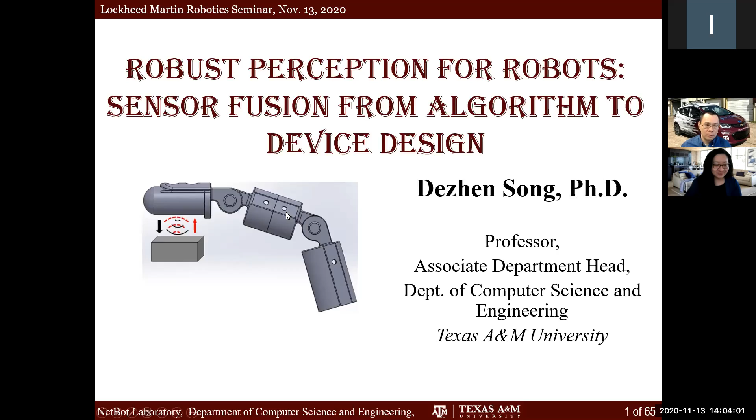So the topic we're going to focus on is the role of sensor fusion in robot perception. We're going to start with 3 questions we're trying to answer: What is sensor fusion? Why do we need it? How do we perform it?

So we have to put this in the context of robotics, because this is our main area. If you're familiar with robotics, you might have heard of this thing called the SPA model. The robot takes information from the environment as sense, forms the understanding of the environment as self, plans for next action, that's plan, and then executes the commands and causes a change of status, that's the actuation or action. So in the SPA model, you can see the information flows in from the sense side. If you have poor perception of something, then the rest of the chain will break down, garbage in, garbage out. That is the reason in my research I focus on the sensing perspective.

So of course, sensor fusion definitely falls in this category.

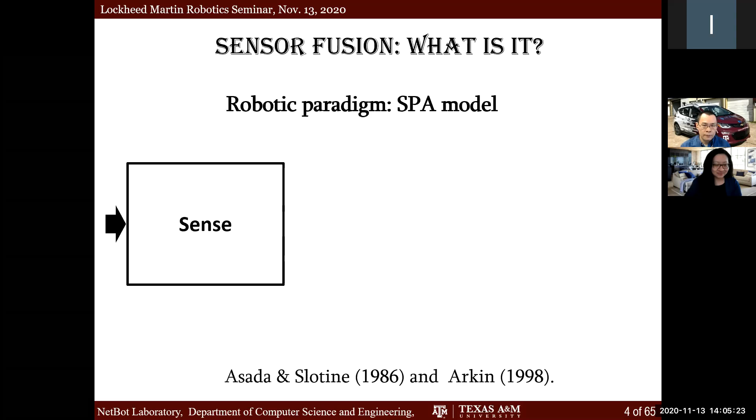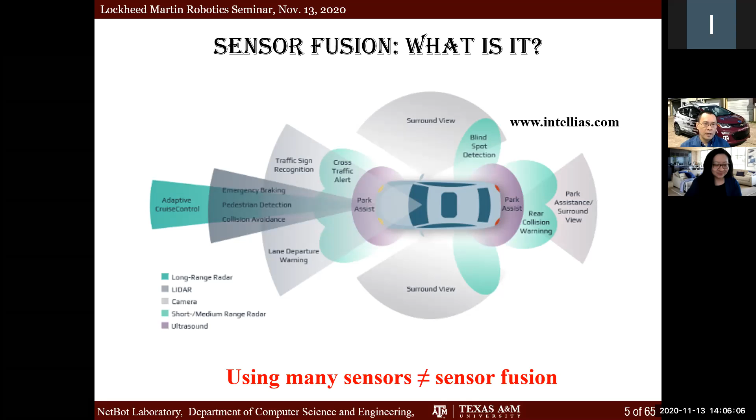I want to put this in the autonomous driving context. This is one of the application areas of my research. You can see that modern autonomous vehicles have many sensors on board, from long-range radar to lidar, camera, short distance radar, ultrasonic, and also GPS, inertial sensors. That's a suite of sensors being installed. But one point I want to mention is that using many sensors does not equal sensor fusion, because sensor fusion itself is trying to reason about the robot status using many sensors.

Each sensor will provide an estimation of the state, which characterizes the status of the robot and the environment it lives in, and we can use a vector to represent that, the X. This has a hat because it's the estimation of the state. You will also come with some sort of uncertainty assessment of your estimation, how good it is. In many contexts, it will manifest itself as a covariance matrix of the random vector X. You might have different representations, but this is just one common way of characterizing uncertainty. In the sensor fusion process, we like to aggregate these estimations to come up with a more reliable, more accurate estimation of the states, and also update its uncertainty range.

This gives you a mathematical context of sensor fusion. But we also need to understand what the states are and what characteristics of uncertainty they have. Sensor fusion itself is trying to reduce the uncertainty. That's two very important metrics when it comes to sensor fusion: robustness and precision. These two things are going to be the main themes in this talk, how to especially emphasize and improve upon those two metrics when you perform system design or algorithm design in perception tasks.

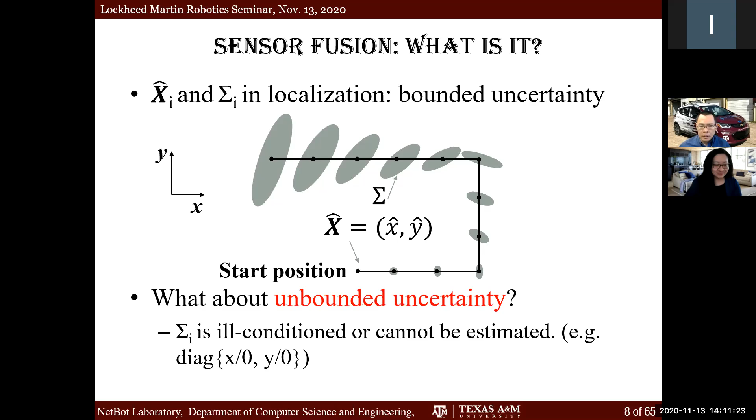So what is sensor fusion from a mathematical perspective with this context of uncertainty? We can look at this from 3 different layers. The simplest one, the most fundamental one we have to work on, we call feasibility. Given the estimation from each sensor modality and its uncertainty, can you figure out aggregate states? You can hook this up in a straightforward way - could be switching, you just pick up any sensor, or maybe you can do averaging, or maybe some smart optimization. But that is feasibility - can you get this result out?

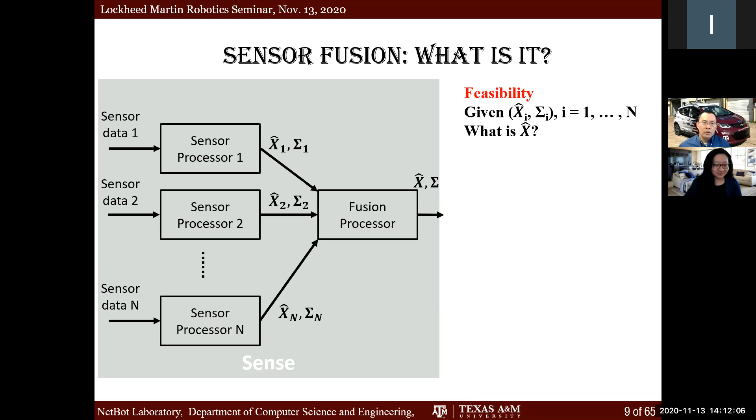But more importantly, if you go to the next layer, that would be precision - if you take uncertainty into consideration. So what is your new uncertainty? How do you minimize it? In the covariance matrix, it's going to manifest itself into things like maximum likelihood estimation, some sort of least squares problems you can solve. You might immediately realize that these 2 layers can only deal with situations where uncertainty is bounded in a nice closed form format, like in the previous example.

So then that goes to the most difficult one, and the one we often run into - sometimes we don't even know how to write it mathematically. We try to give it a mathematical characterization here, which might not be accurate, but we have something to start with - so-called robustness. You're given the uncertainty measure and the readings/estimations of the states, trying to ensure your output uncertainty is bounded, even when some input uncertainty is unbounded. Is this possible or not? Can you solve this? This is more of the robustness issue I deal with.

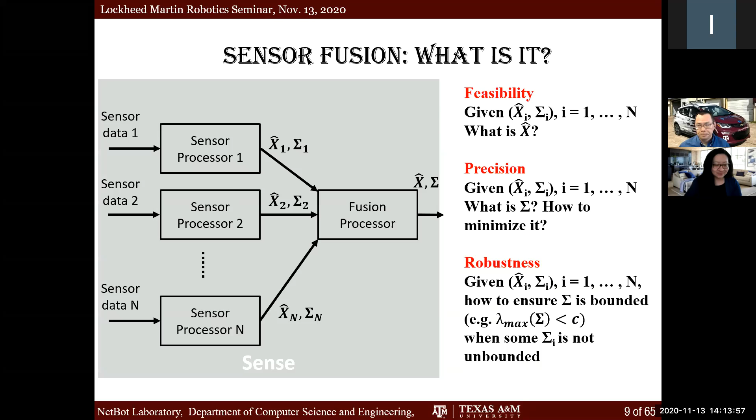So this is the kind of problems that we have to address. Robustness is the key thing here in perception. So how do we get there? I'm trying to use previous examples of how I personally got into this research area, trying to understand this problem through different robot and perception system designs.

I'm going to start with two early projects we did in our lab. The first one I'll talk about is the autonomous motorcycle we built back 16 years ago when I was a grad student at UC Berkeley. The design was at the time when we were participating in the DARPA Grand Challenge, in 2004 and 2005, two times.

If you know a little background, you're probably aware that the DARPA Grand Challenge essentially got this wave of autonomous driving trend started. As an early participating team, DARPA gave out a $1 million prize to encourage people to come up with autonomous driving strategies.

This was over 16 years ago. At the time, computation and sensing were very primitive. Also, the environment they were dealing with was not much easier. So DARPA was trying to do this crowd-sourcing type of approach to figure out who could solve this.

The competition was to design an autonomous vehicle that could drive over 100 miles on desert terrain, because the real motivation behind this was that the US was at war with Iraq at the time, the second Iraq war. Convoy trucks could get attacked by roadside bombs, and they were trying to see if they could get autonomous vehicles to deliver goods to frontline soldiers. So that's the background story behind it.

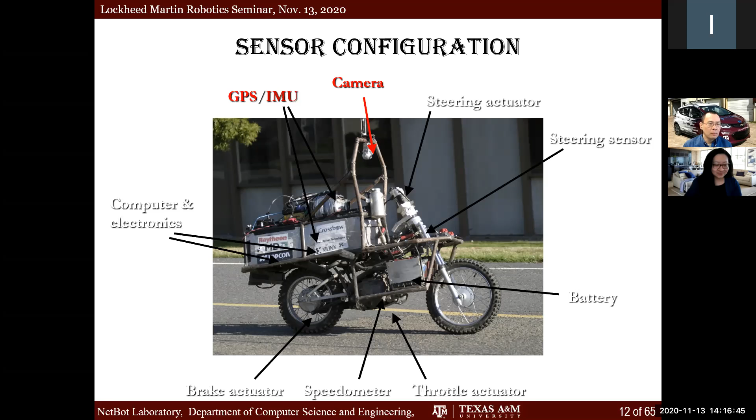The idea at the time was basically what we call GPS waypoint navigation, with camera to help navigate the terrain.

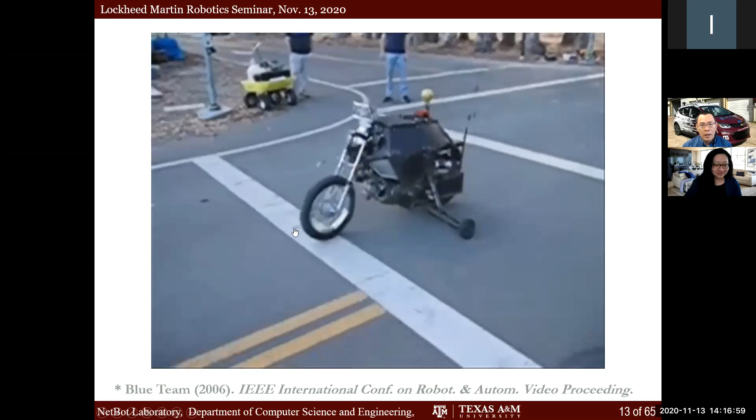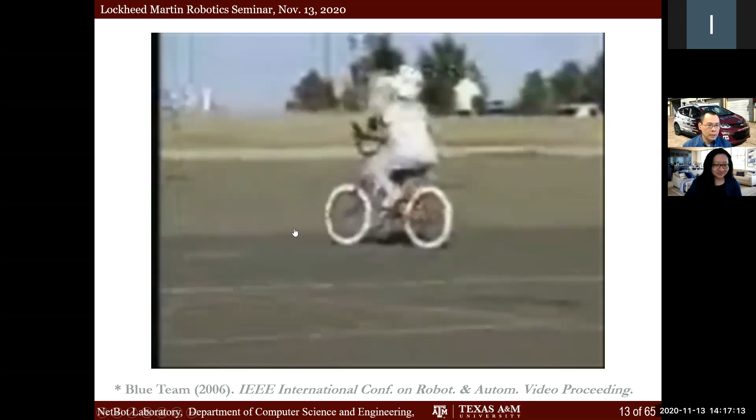GPS itself was not accurate enough at the time. We didn't have RTK GPS 16 years ago; it had accuracy of only around 10 meters, sometimes even worse. GPS alone would not be able to keep the vehicle on the road. We had to recognize the terrain and guide the vehicle in the local coordinate system while following the global GPS route. We also had to use sensors to help balance the vehicle, putting all these navigation tasks together.

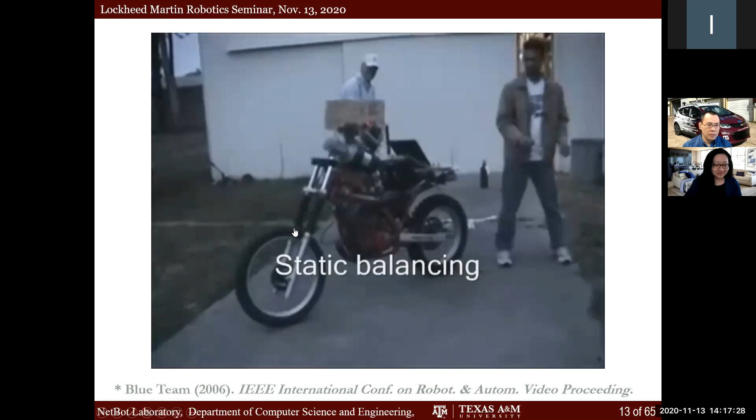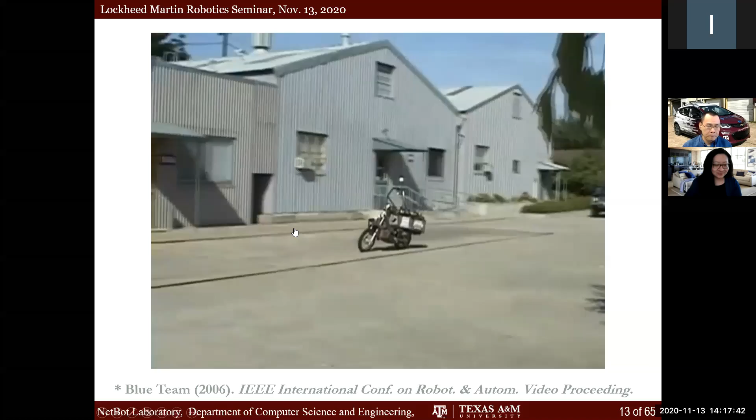I realized that for a lot of tasks, you just have to combine those sensor readings all together. No single sensor can solve the problem we are facing. I'm not going to run the entire video, I just want to give you the background idea behind this. Now I want to move to the next slide.

During the competition, there's actually a bit of history behind it. One of the teams was named Velodyne. If you're in the autonomous driving domain, you might be very familiar with this name now, because Velodyne essentially started as a DARPA Grand Challenge 2004-2005 competition team. Their biggest contribution was prototyping the 3D lidar system, one of the early lidars built, which eventually became the Velodyne product we're very familiar with in the autonomous driving domain.

This is you witnessing history here. It takes you back to 2005, when this whole thing had a size of a couple of feet in diameter. Right now it's much smaller. After the DARPA Grand Challenge, we have this thing called the DARPA Urban Challenge. We did not participate in that because one explicit requirement for that competition was 4 wheels, and we only had 2. So that's what we did.

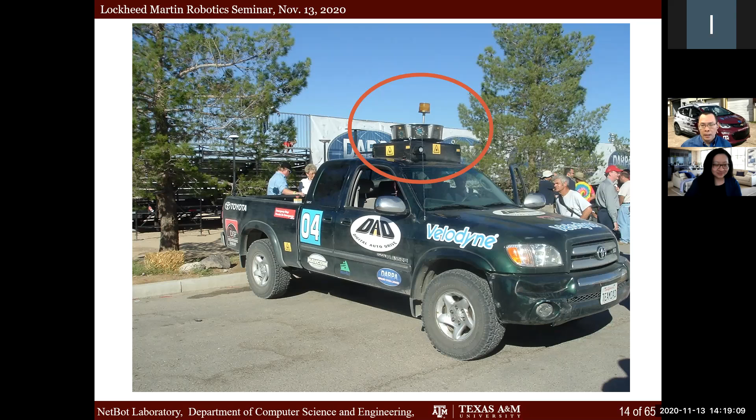I moved to A&M to be a faculty, but my team at UC Berkeley formed a company led by Anthony Levandowski called the Berkeley 510 Systems. That team was acquired by Google. The task at that time was to build two vehicles you all know today: one is the Google Street View vehicle, the other is Waymo, the autonomous driving vehicle you're all familiar with. We're very happy that our team played an important role in this piece of history.

If you look at the Waymo vehicle, you can see the Velodyne lidar on top and the other suite of sensors put together. It's gradually formulated kind of a standard template of how many sensors you have to use for autonomous driving. But actually, sensor fusion is not just for autonomous driving.

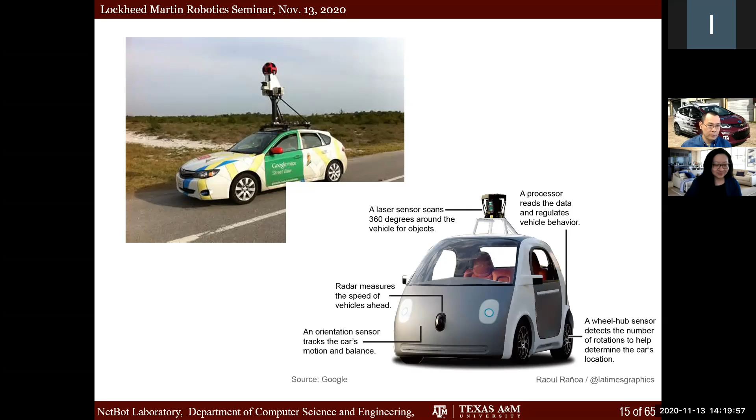It's also important for service robots. In this case, I'm going to talk about a very expensive service robot, Robonaut, the robot astronaut installed in the International Space Station. In this example, I'm going to show the importance of precision and robustness needed in such a system design.

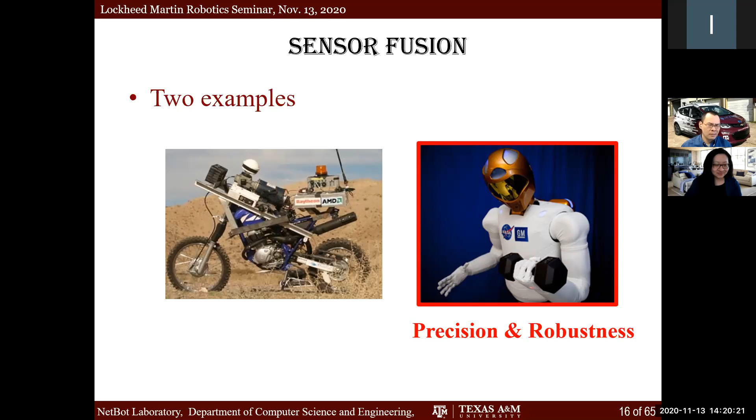So the robot astronaut itself is a humanoid, actually not exactly humanoid. The upper body is humanoid, the lower body is a little different. But it is also the only robot that wears clothes.

My first thought was maybe it's just to make the robot look better. No, it's actually for its purpose. The clothes protect the sharp edges of the metal surface, so when this robot works closely outside the International Space Station, it will not cut the astronaut's spacesuit open. It's a kind of protection mechanism.

It's a soft armor. But it also tells you that the robot has to work in a very tight space, and you need to know its precise location while it's moving around in the space. There's no GPS, and the robot also needs to know the 6 degrees of freedom pose. So you need to solve that simultaneous localization and mapping problem.

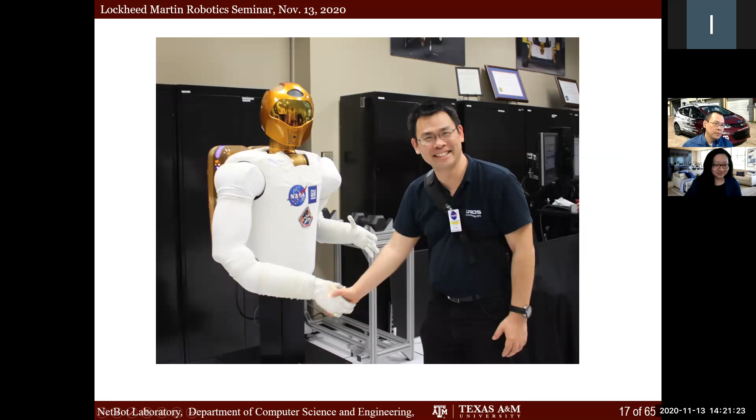This is called SLAM in robotics, simultaneous localization and mapping. The purpose is to find solutions for two problems at the same time: localization, where am I, especially in this case the 6 degrees of freedom pose, and mapping, what does the world look like? This has a lot to do with the sensor type and your landmark type, but you have to characterize your environment as a map.

So how do we deal with this? The robot, keep in mind, when it was first designed, was designed as a teleoperated robot, not as an autonomous robot. So it has a whole bunch of issues with the perception system we have to fix.

But what's important to keep in mind is the working environment. It could be inside the International Space Station or outside. So if we design for this, we cannot add any additional sensors to it; we have to use onboard sensors. In this case, what's available to us that we identify as most useful is binocular vision installed in its head, and also the high precision IMU installed in its body.

But it actually sustains some sort of vibration from time to time, so the IMU may get off, and vision may get challenged when you face the dark side of the universe—you might not have good landmarks to help. So it's very important to come up with a robust solution that can deal with this environment change, when your camera's dynamic range can be challenged, and your IMU can be challenged.

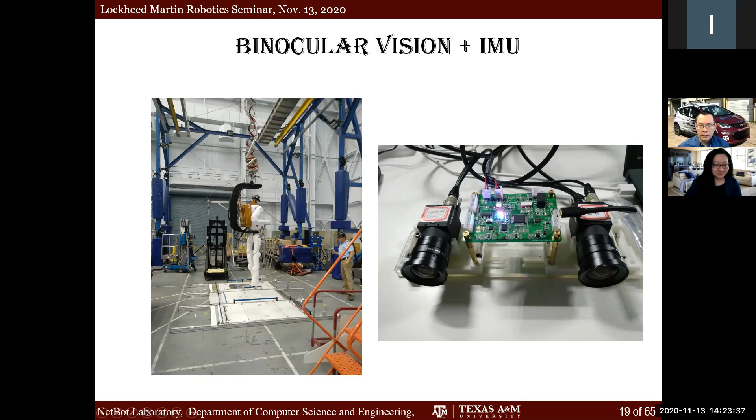Eventually we work out that problem. In fact, one of the results—if you're familiar with Visual SLAM, this video might look very familiar to you. The little pyramid is essentially the perspective of the camera we estimated.

The dots, the red and the black ones, are the landmarks - feature points being extracted and correctly matched to each other. In this particular example, the robot is doing a figure-8-shaped dance. We're trying to give people the idea that this is able to do a full 6-degree-of-freedom estimation. This doesn't tell you how the integration of other sensors works, but essentially it is a result of all of this working together.

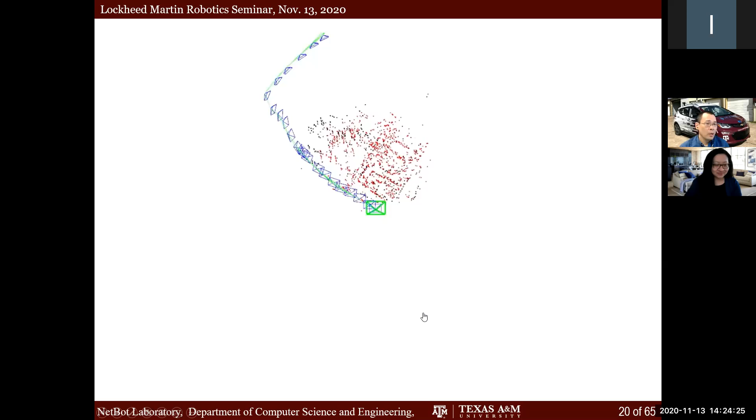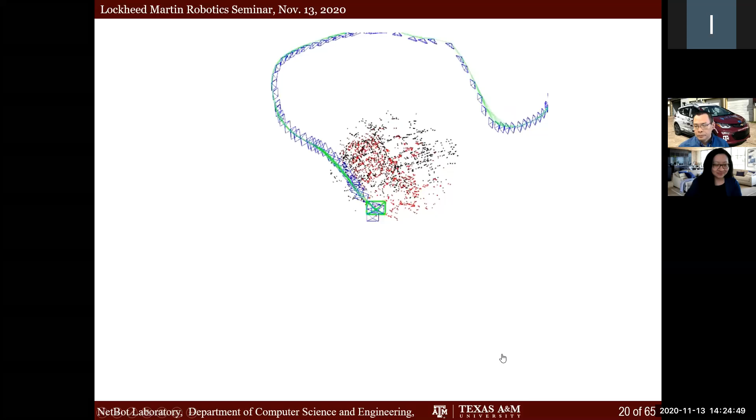The idea of combining an inertial sensor - essentially what we call a proprioceptive sensor - with a camera, which is an exteroceptive sensor, is not a new concept. It is a common way that robotics combines different sensor properties to achieve a robust result. In fact, it is also used in... I'm going to stop this video and move to the next slide.

It's all being used in some handheld devices, like the iPhone. In 2017, at the release of iOS 11, Apple CEO Tim Cook announced the very important milestone of augmented reality: the release of ARKit. This is the first time a regular user outside the lab can really experience what augmented reality is, and that it can run on a mobile platform with limited computation resources, like a simple phone. This is a very important milestone, and also very important for people in the robotic perception domain.

Essentially what the phone is doing is a visual inertial SLAM algorithm inside the iPhone. They combine the IMU on board the Apple device with its onboard cameras, computing in real time the camera pose - essentially the phone pose - in relation to objects in the environment. That allows you to insert a virtual object inside it. This kind of started the era of augmented reality for mobile devices for the mass market. 800 million devices have it, 800 million people can experience it. This is probably the most accessible robotics SLAM software we've ever seen.

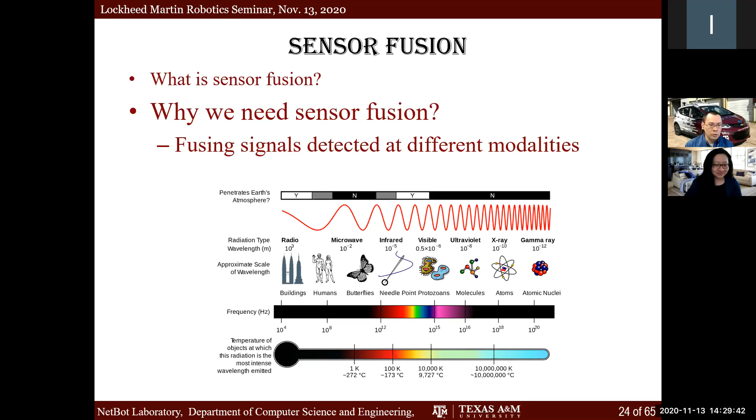Different sensors work on different signal spectrums to give their own unique perception range and capabilities. If you use that well, you can increase safety, and more importantly, ensure that the vehicle will be able to avoid things ahead of time.

One thing I want to point out is that although there are many types of sensors, you can quickly classify them into two categories. Exteroceptive sensors - camera, lidar, radar, acoustic, even GPS - they rely on external signals.

Anything relying on external signals may have trouble when the environment becomes extreme, like poor weather conditions, snowstorms, whiteouts, severe thunderstorms. You might have interruption of signals. You might not get what you want.

Another group of sensors is proprioceptive sensors - inertial sensors, encoders, force sensors. Those sensors' perception process is less affected by the external environment. They're mostly reliable in that sense, but they're not very precise. They do drift a lot.

But biologically, humans also have these two types, and we combine them naturally - just like when you close your eyes and walk a few steps, you have no problem avoiding obstacles from memory. You have a natural integration between these two sensors. So those are the two classes of sensors.

When we design these things, we have to take them into consideration. If we look at this from the uncertainty perspective, you can see exteroceptive sensors' uncertainty model is like a bimodal distribution. If it works nicely, it's relatively accurate and its amount of drift is small. But if it doesn't work well, you have a really big uncertainty range.

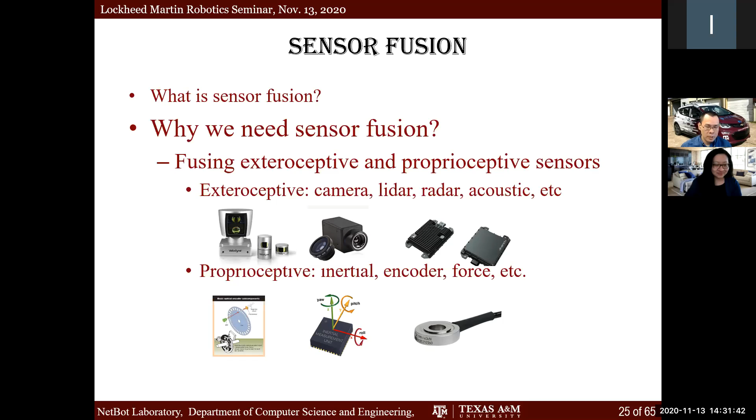That's actually why you need to work with them both to make a reliable perception system. So then we can dive deeper into sensor fusion problems. You can see we have to solve a bunch of small problems to make it happen.

We have to make sure we synchronize all the data readings from different sensors. Temporally, we need to know they receive data at the same time, and we need to make sure they're working in the same coordinate system so we can combine it together. So calibration is a must.

Also, there's a correspondence issue. If you do not have good synchronization and calibration - for example, your data may be captured by different platforms at different times - there's no way to synchronize them. Then you have to figure out how the objects of interest correspond to each other in different data streams. That becomes a correspondence issue.

Of course, if you solve those problems, then you have to face the problem of putting them together to come up with a combined aggregate state estimate and its associated range. That will be the fusion.

You can do simple rule-based filtering and switching. You can do filtering-based or optimization-based approaches. It's up to you to design these things. And of course, at the end of the day, you could design a new sensor that leverages different modalities simultaneously, which we'll touch on at the end of this talk.

If you look at this from the three layers of problems we talked about earlier, you can see that if you talk about feasibility of sensor fusion, that just covered the first bunch of sub-problems. And if you go a little bit deeper for precision, you really need to look into optimization and filtering-based approaches, because those give you explicit closed-form representations of uncertainty.

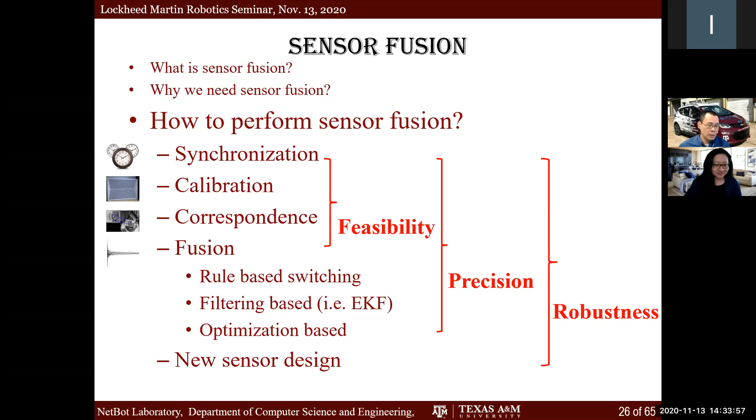And we're going to touch on this in the next few slides. But before we start, we're going to go through 4 examples. So this is just a quick review of the three layers of problems we've been talking about in sensor fusion, to put it into context.

So the 4 examples I'm going to talk about - I'm going to start with feasibility, the calibration-enabled sensor fusion.

This is really just solving the first layer of the problem, the feasibility side. So for when you're working with exotic sensors, in this particular case, a ground penetrating radar that I've been working on. Why would we want to work with it?

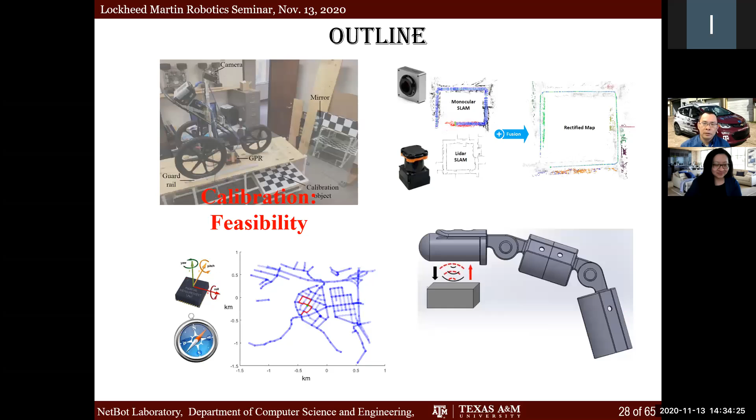Because there's a need. The need is to keep our infrastructure well maintained. The US freeway system was established a long time ago, some segments are 75 years old. So bridges are already at the end of their service lives. They need frequent inspections. Bridge collapse accidents happen from time to time. But the problem is there's no way we can afford manual inspection—that's very labor intensive for all these bridges. So the deteriorating infrastructure calls for an automatic inspection system, especially a robot-mounted inspection system.

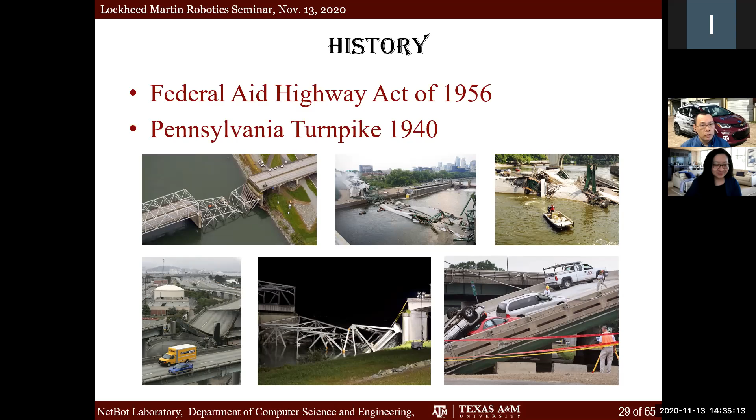In this regard, one of the most capable sensors for doing this is the ground penetrating radar. We found that this radar system is actually a terrain following device. It does not have the ability to provide full-scale mapping to give inspection results that can be used by a repair crew with precise localization. So we try to combine this with other sensors, like camera and lidar, as we're all familiar with, because this is going to help us.

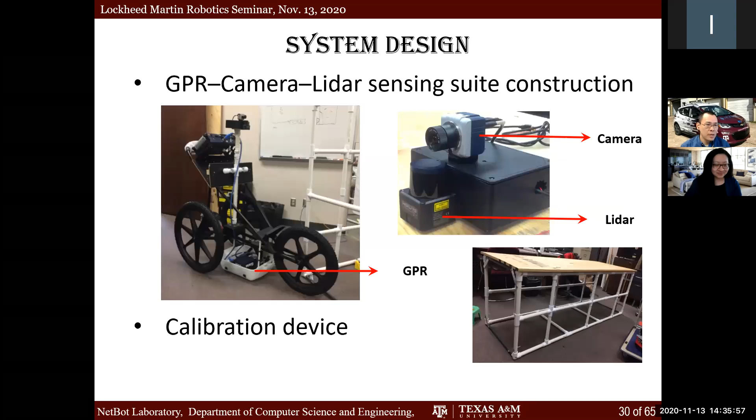But a problem immediately pops up: how can you make these sensors work together? They don't even have joint coverage range. Ground penetrating radar, by definition, looks at things underneath the surface. But the camera and lidar only look at surface objects. But you still need them to co-register in the same coordinate frame. If you link this, you want to make sure they can be expressed in the same coordinate system. It's essentially an extrinsic calibration problem for a sensor suite.

In fact, we can narrow this down because we have a lot of sensors in this design—cameras, GPR, lidar, and encoders. We just need to solve, here we only focus on the calibration between the camera and the GPR, because the rest of them solve the problem within the robotics domain. I don't have to explain them here.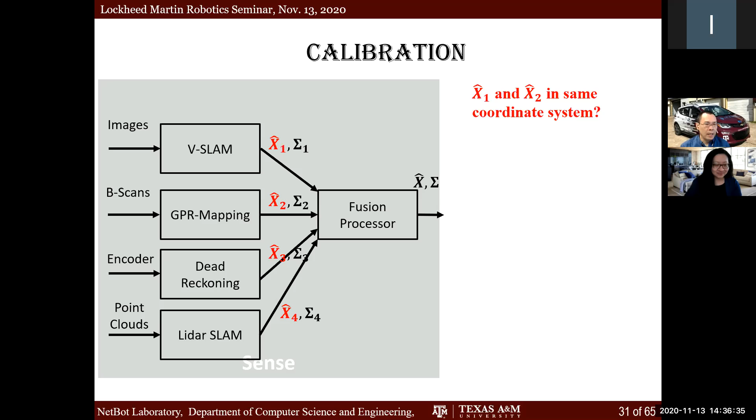It actually creates a parabolic signal, and we can extract the coordinates from parabolic signal extraction. On the other hand, we set up a mirror that allows the camera to look underneath the calibration bridge and be able to see this checkerboard. Of course, we also have to estimate the mirror pose. So this constitutes the calibration system.

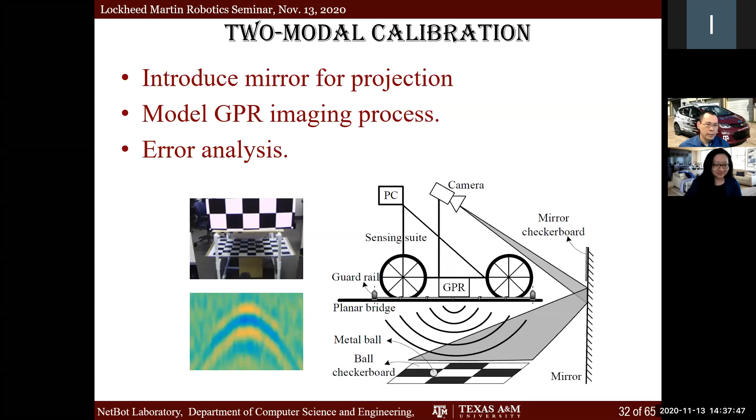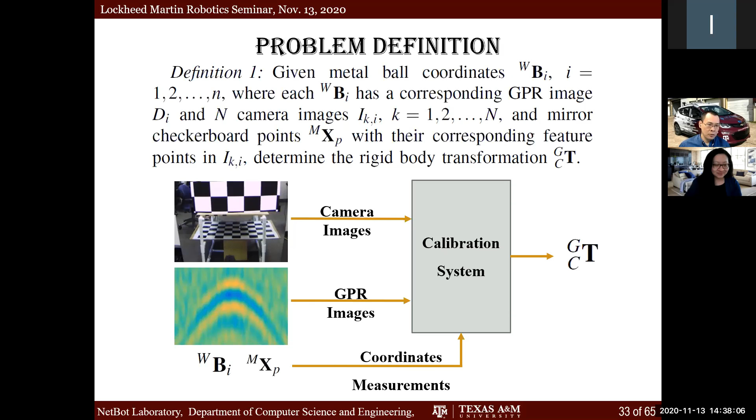They provide data for us to be able to estimate the rigid body transformation between the camera coordinate and the GPR coordinate. So the problem definition is just trying to use the camera images and those parabolic signals created by the ground penetrating radar to figure out the rigid body transformation. So the problem itself essentially is to estimate how these two types of sensor readings can relate to each other in the same spatial coordinate system.

I'm not going into the detailed design, I just need to give you the idea: you need to be able to estimate the camera and the mirror pose, and also extract the signals from the ground penetrating radar to get those parabolic center positions.

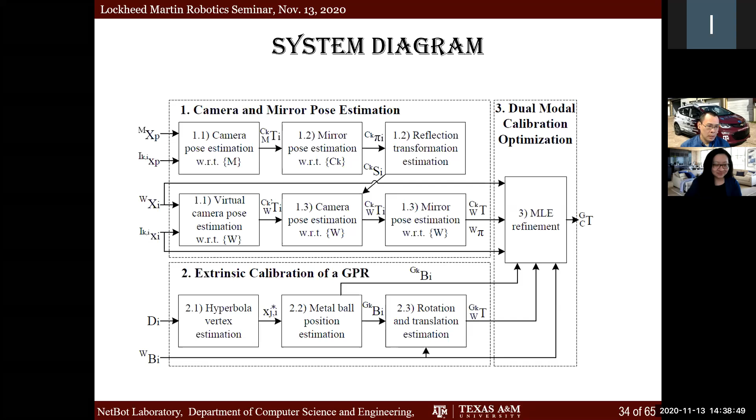When you get all this together, you can fit them into an MLE framework, maximum likelihood estimation. You can also have a nice closed-form representation of your uncertainty range, because everything we do can reasonably assume Gaussian assumptions in pixel coordinates and in GPR coordinates, then we can derive how the uncertainty works in our estimated transformation. So essentially you have to put it into perspective projection model, mirror reflection model.

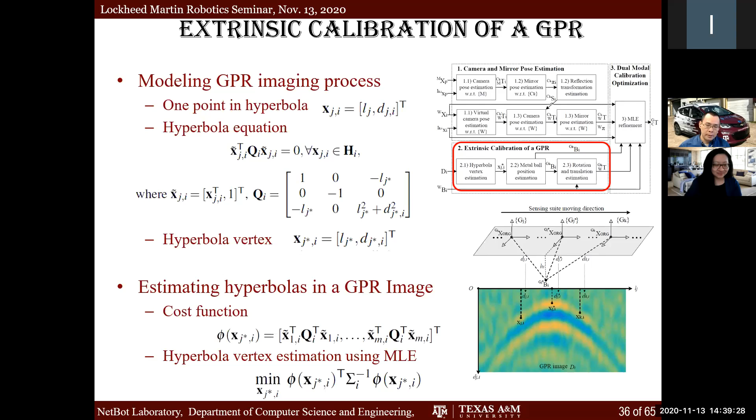You estimate the camera pose and the mirror pose simultaneously, putting it together with the GPR parabolic extraction model, because each metal ball creates a parabolic response in the GPR reading, and the parabolic vertex is essentially where the ball is in the GPR coordinate, allowing us to obtain its position in the Euclidean system. Putting all this together, we minimize this, then do error analysis to obtain the uncertainty. That gives us the answer we want: the cross-coordinate system transformation, and the kind of uncertainty introduced to the system. Later, when we do sensor fusion, these all play a role.

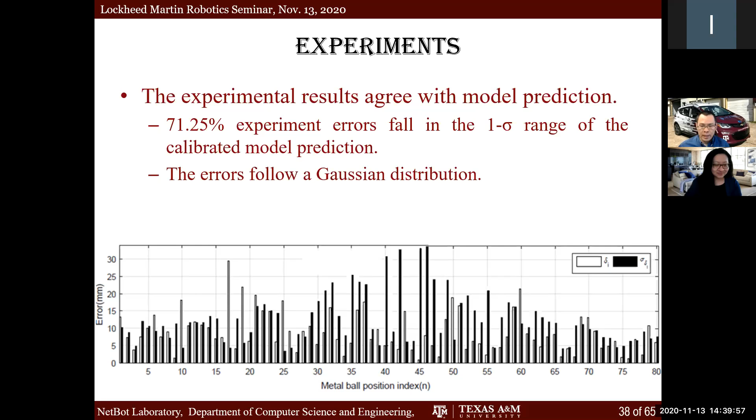So we test it against our ground truth, and it works. You'll have to believe me on that, but time doesn't allow me to go into the details or read all those errors and maps and things like that.

More importantly, those readings being registered to the 3D coordinate system, we know precisely where they are. If you want to open up the bridge to break the concrete, we know where to operate to fix the bridge. So that's how that helps serve the purpose.

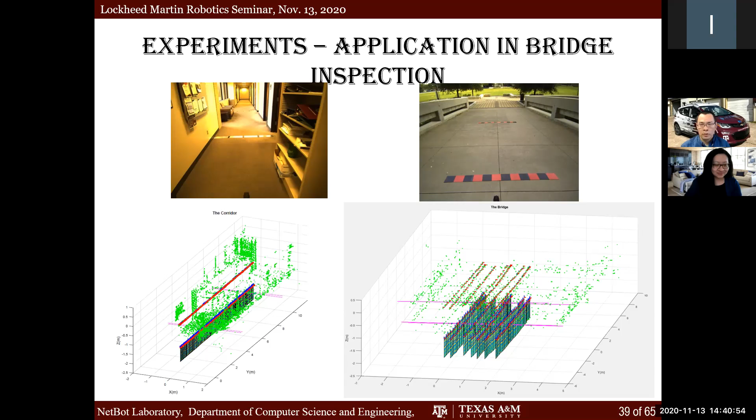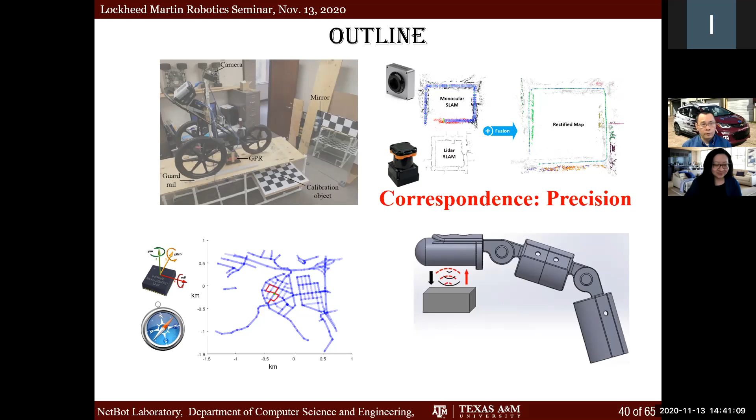The next example I'm going to go into is more focused on the precision side, and also addresses the correspondence side of the sensor fusion problem. So what is this problem we're working on? We go back to the SLAM problems that we introduced: the robot has to estimate its location on the map.

In this case, we have two types of robots. One robot is relatively big and expensive, equipped with lidar. The other robot is actually a cheap home service robot, only having a camera. So the idea is: can we combine the map created by the expensive robot to provide that to the cheap robot, so the cheap robot can achieve a similar level of robustness and accuracy as the expensive robot?

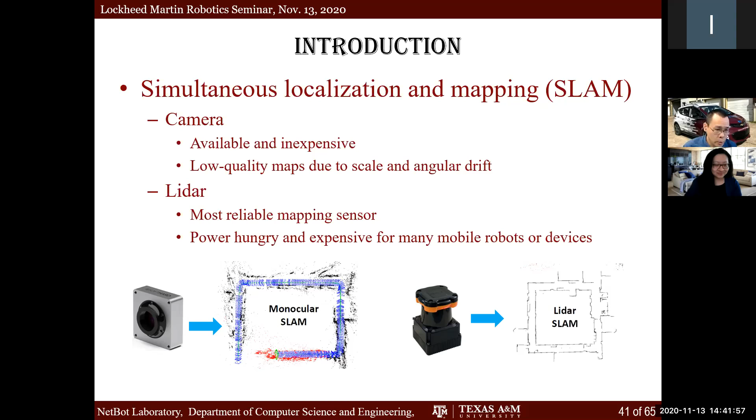Essentially, we try to do a map fusion, combining the monocular SLAM result with a lidar SLAM result, with the hope that this result is going to be better in accuracy and robustness. Once this map is combined, it can be used by the cheap robot without lidar, making it more accessible to other robots in the environment.

If you look at this case, it's a typical sensor fusion problem, but different in the sense that you don't have to solve the calibration or synchronization -- it's totally from different sensor streams. You just have to do the map fusion. In this case, this really helps figure out how to find the corresponding object.

The quick design of this would be trying to find obvious objects aligned to each other, in this case planes in the physical space. We can detect them in the camera image reliably because they're supported by many, many points, so the accuracy will be pretty good. We can also detect them in the lidar readings, the point clouds, for a similar reason.

Then we create an optimization-based approach to align them together. This not only helps rectify the visual SLAM result, but also brings this into the world coordinate system. Because if you're familiar with vision, you know a camera is a bearing sensor -- it does not give you proper size. But when we fuse this together, you get a metric measurement.

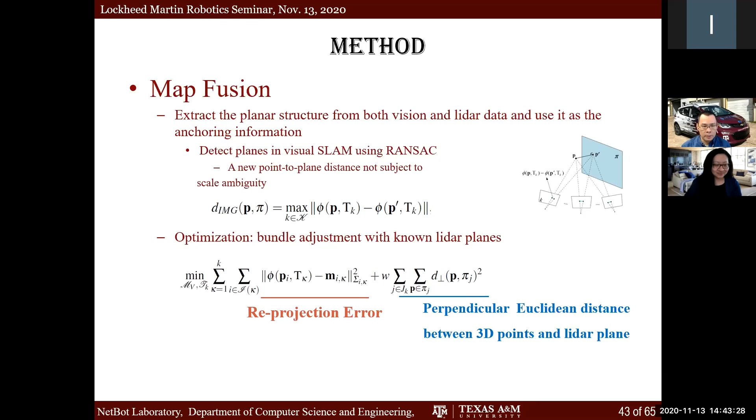So with all this together, we run this map fusion algorithm and get a more reliable map. More importantly, we can prove the covariance matrices of these landmarks in the combined map will have eigenvalues smaller than those of the separate maps from either lidar or camera alone. That means accuracy is improved.

We also did this in simulation by trying to add more planes in this test case. You can see the robot trying to move from start to end along a designed trajectory in the indoor environment. We have four planes. When a plane was detected, if we're not using that, you can see the uncertainty grows.

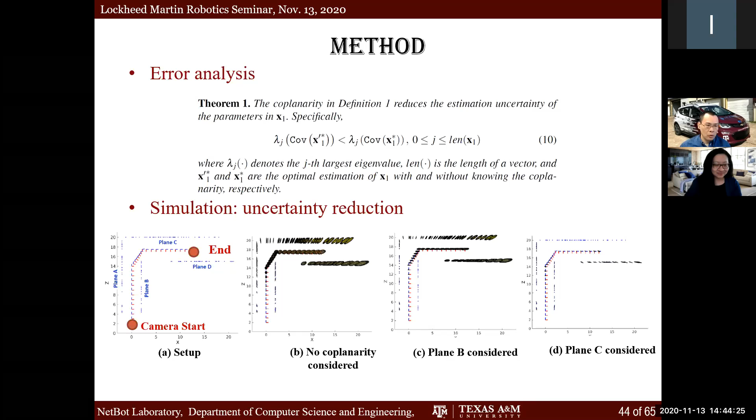This is very similar to the example I showed you earlier, because the ellipsoid grows larger and larger. But if we start adding the planes into this, the constraints help reduce the covariance and the uncertainty gets reduced. And of course, the map gets more accurate.

So of course we test that on the real environment, in both the indoor data collected in our own building, HRBB. We have these planes being used, many planes being used, and the trajectory verified is much better than pure visual SLAM or lidar SLAM itself.

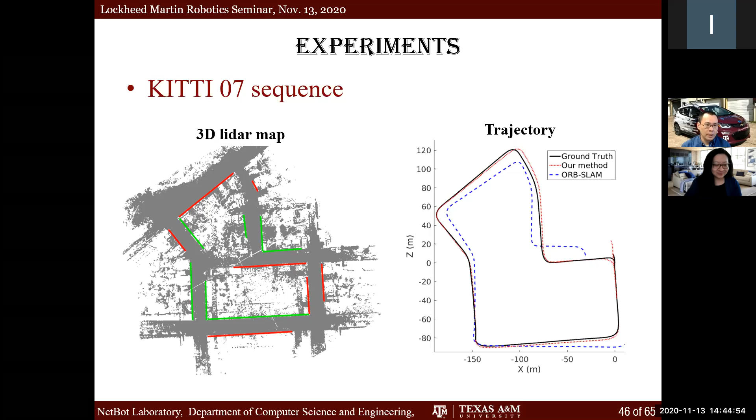Then we also run that on the open test dataset, like the typical KITTI dataset in city blocks, and we found that this works better than any existing algorithm available at the time. We did a longer sequence of kilometer-level length and it still works.

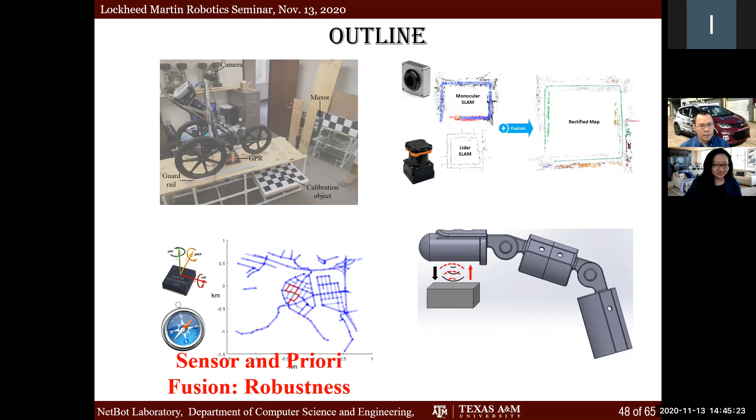And this actually allows us to go into the next topic. This is really the design for robustness to an extreme. So why do we say this? We still want to solve the localization problem in this example, but we really want to deal with the most extreme case situation. So what is the extreme case situation?

Very bad weather, poor illumination conditions. You don't have any GPS signal. You don't have good visual features at all. You don't have even reliable lidar inputs. Even radar may get blocked with all the snow. And you still want to find your location, where you are in the city.

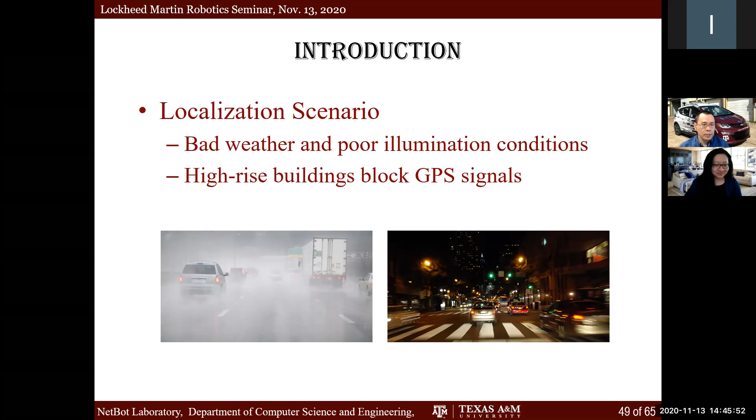So how do I do this? Because this is the ultimate test for robustness. How do I do this? Well, we pick the sensors that are not going to be affected. We design a map-based localization. We don't rely on any external perceptions in this case. Just trying to do a sensor fusion with a few sensors available to us.

Which means we will use IMUs on board of the vehicle, limited input from compass if we can obtain a stable reading, and of course a map. We're going to fuse this input to figure out where am I.

The idea is relatively simple. If I can do dead reckoning with IMU and compass reading, I can extract a discrete set of heading changes. So what I'm saying is here we only use a minimal approach, only using the heading changes. Let's say this sequence, can I match this with the map? To create a map, find where am I? As long as the map is not like a Manhattan district where everything's rectilinear, then I should have a chance to find where am I.

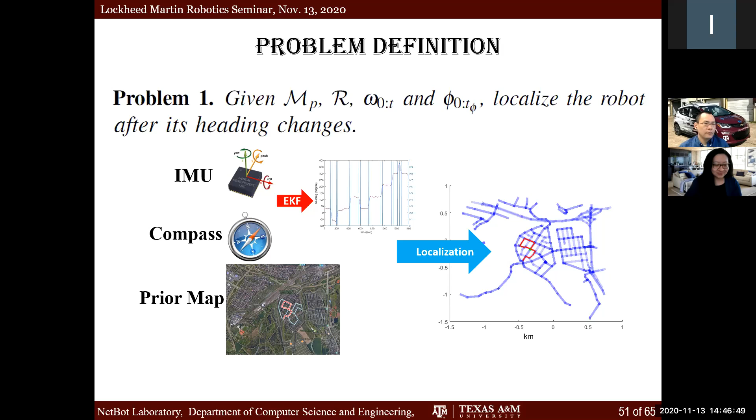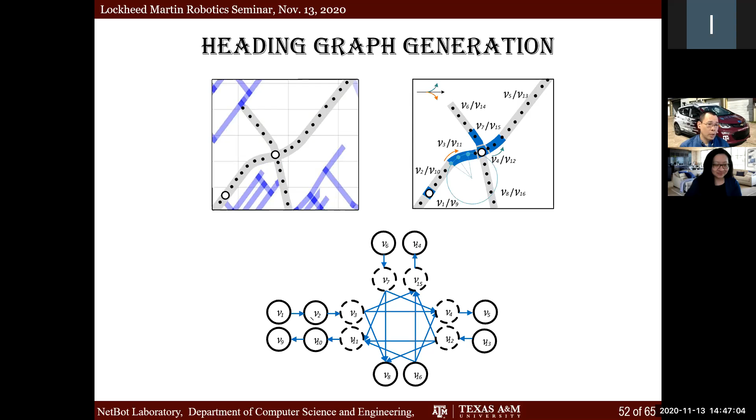But essentially, to do that, we also discretize the existing map into heading representations. How heading changes is a discrete representation of the map. And this gives us an index data structure that we can quickly compare to our heading sequence extracted from the IMU and compass readings.

So this is basically giving us really the minimum solution we need. I mean, this work was done three years ago. Right now, we can also incorporate heading and distance together to create a more reliable and quicker convergence on this. But for simplicity, we only use heading information here using the heading sequence.

But what's important, we can prove mathematically that as the heading sequence length increases, as long as they are not confined to the limit of a rectilinear environment, the Bayesian conditional probability that you're going to find your true location will increase over time.

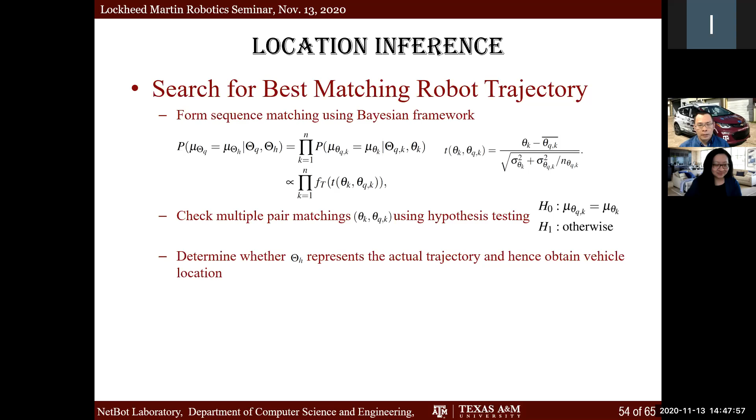And these are encouraging results - that probability is really a function of how many intersections you have, how many potential headings you would have, and how complicated a map you have. All this together gives us the idea that if you're on a regular map, not the specialized rectilinear city - which we did find interesting literature about, discussing city heading distributions over all the major cities in the U.S. and the world - the rectilinear environment is actually just a special case. The super majority of cities have a large distribution of headings, which really helps this algorithm succeed.

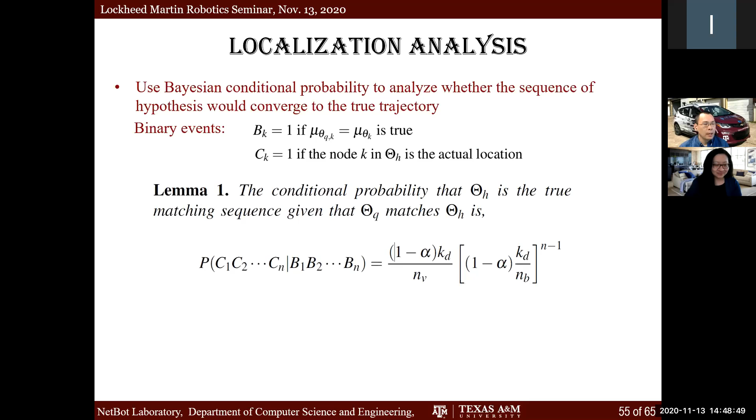So we did test this on the KITTI dataset. The KITTI dataset is collected in Karlsruhe, Germany, and that city is pretty friendly to this particular approach. We also did this in our city, College Station, to see how many observations, essentially how many turns I need to make, to be able to find my location.

On average, it takes about 6 to 8 turns before my algorithm is able to identify where I am in that map. It's not too bad. In fact, in reality, if you get lost in such a bad environment, you can really drive your vehicle to help the algorithm find where you are, and that will make the convergence a lot faster. So that's kind of the design-for-robustness idea behind it.

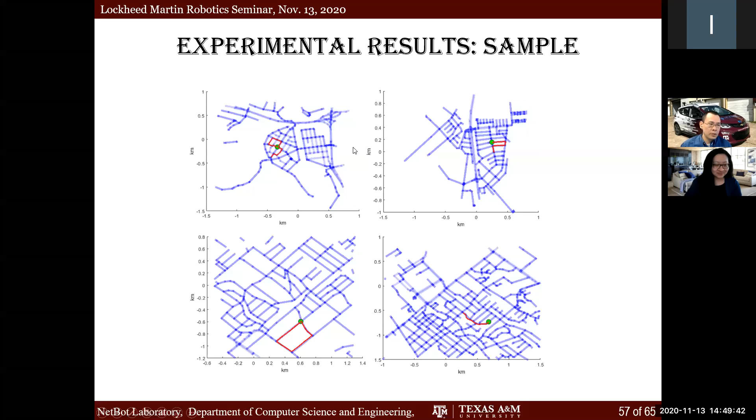And this gives you some examples of the trajectory that's been driven until it finds its location.

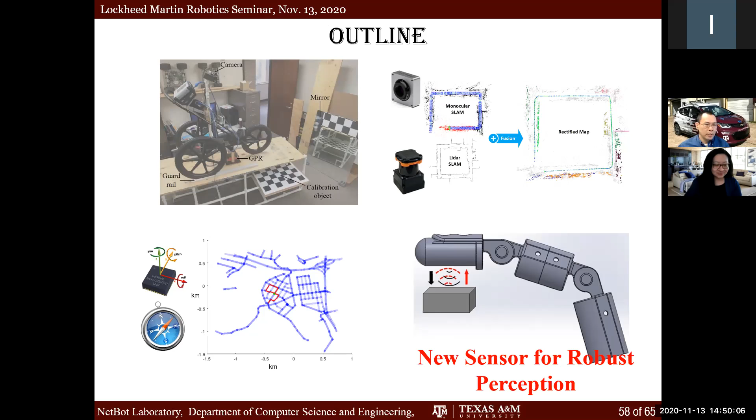So the next thing I want to do, which is also the last part, is talk about how you can design a new sensor using the sensor fusion idea. This is actually an ongoing work funded by the National Science Foundation. So what we're dealing with here, I completely get out of the robot navigation domain. I'm going into another traditional domain of robotics, and this is grasping.

So we want to design a sensor fusion type of sensor that can measure the object to be grasped - the near distance ranging, the material type, the surface structure, and whether it's a thin shell object or a solid object.

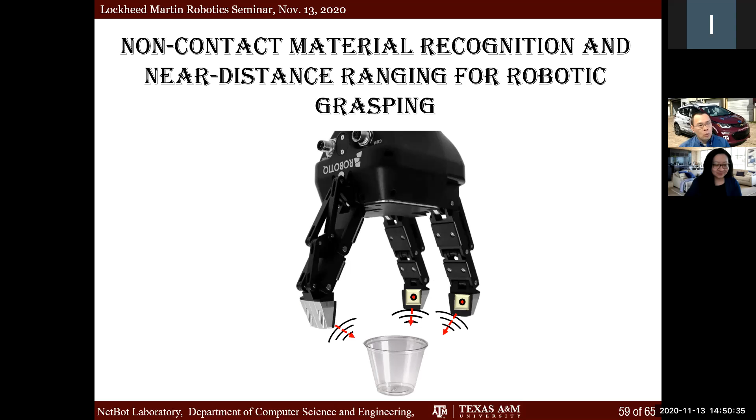This is why we need to do that. Because when the robot moves from the factory floor to more of a service market, it needs to be able to deal with unknown objects, needs to grasp unknown objects - objects that don't have their shape or material type stored in its library.

For example, humans are very powerful. We can grab an egg or a dumbbell without breaking the egg, because we know what kind of material it's made of, we know the friction coefficient. Empirically, of course, we can get an idea of how much force we should apply, how we can grasp it.

So basically, the robot needs to be able to know the material type and internal structure of the object to have reliable grasping.

So a common approach would be to use a camera to recognize this, but the problem is when you're getting close to the object to be grasped, occlusion will block you from getting a precise pose estimation. And also, appearance can be deceiving - with the same paint pattern, you don't know the material type underneath it.

Or you might use tactile sensing like human grasping. The problem is any tactile sensor requires you to contact the object. The contact itself may either damage the object or change its configuration, making your grasping plan fail. Or you might use a proximity sensor, but existing proximity sensors have problems dealing with general objects. This is kind of a challenge.

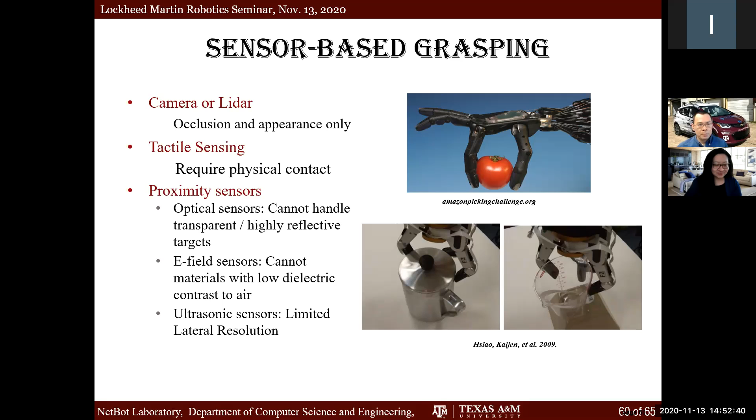It's built on something called the optoacoustic effect. So what does that mean? We're shooting short laser beams at the object. When the laser beam excites the object, it creates a vibration - an ultrasonic vibration - and returns an ultrasonic signal. This is called the optoacoustic effect. You can immediately think of this as using two modalities at the same time already.

And we receive the acoustic signals. We can perform spectrum analysis, because that mechanical vibration carries both the material type information and what kind of structure is underneath it.

With this idea, we want to design this sensor to put into the robot finger. The working distance of this sensor is usually less than 1 centimeter away from the object. Before you contact the object, the laser beam is fired, and I can know what kind of object, what type of material this object is composed of - is it thin shell, porous, or solid material type? Then it can help me with grasping.

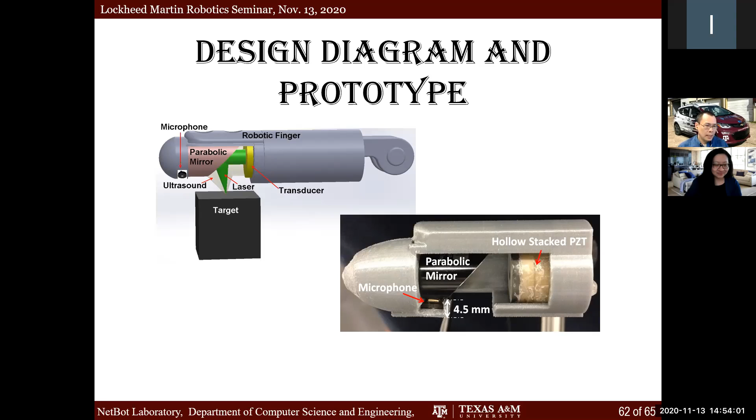So a prototype is being built, and we are testing it at this moment. You can see this is basically doing sensor fusion at the very front end of the data flow, where you acquire the data. So we tested on different materials - steel, acrylic, and rubber - and we're trying to build a library for other possible materials. So we're in the process of doing this material scanning.

We also have a fingertip SLAM, so we are doing the reconstruction of material on the fly into shape and type of material distribution before the grasping. This can help the robot grasper come up with better plans, and the data improves the successful rate of the grasping, to increase that.

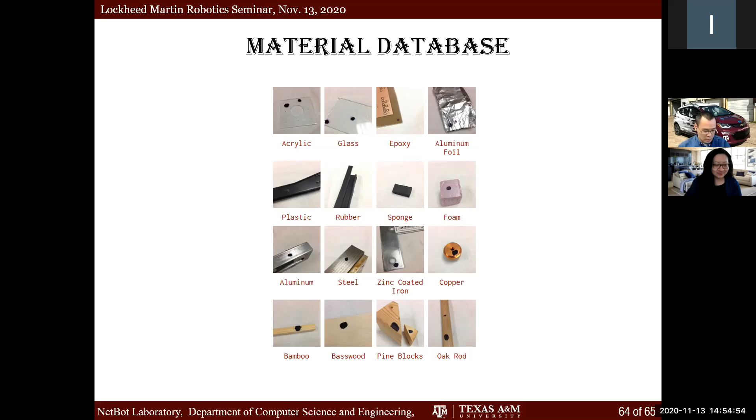So that's the idea of designing the new sensor with sensor fusion in mind, really moving sensor fusion to the front end. That's my talk quickly summarized.

There are other things going on in my lab. We're still doing autonomous vehicle research, leading a team to compete in the Auto Drive Challenge organized by General Motors. We're currently the best team in the US, second best in the world. We're also working with the American Railway Association to develop inspection algorithms for railway buckling, which is also a sensor fusion approach. My group has also been active in animal detection, natural environment observation applications, and storm tracking with UAVs and things like that. Due to time, I'm not going into these projects, but feel free to visit our webpage to learn more.